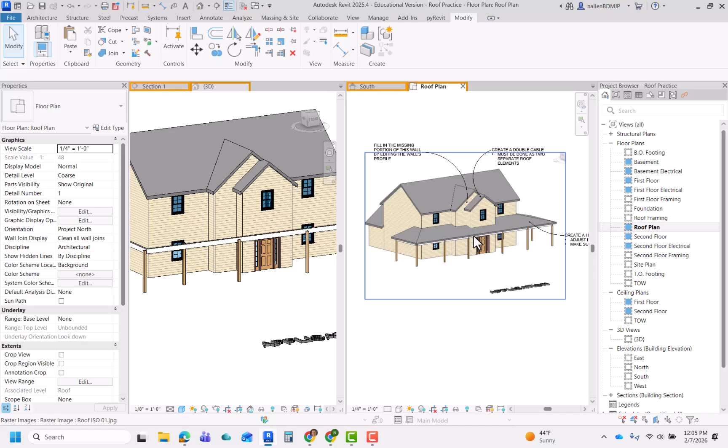Now in the project that I've given you, there are some columns and beams in here already. And all this video is going to focus on is how to modify and make these columns and beams correct. And then the next one, the last one, will be how to put in that hip roof.

Okay, and if we investigate this and look closely at it, you can select on that beam and you recognize this is actually a wall. It's this basic wall here. That's how it's been created. Just like any other wall, it just happens to have a very high bottom constraint. In fact, the bottom constraint is the top of the wall. And then we've dropped it 1 foot from there.

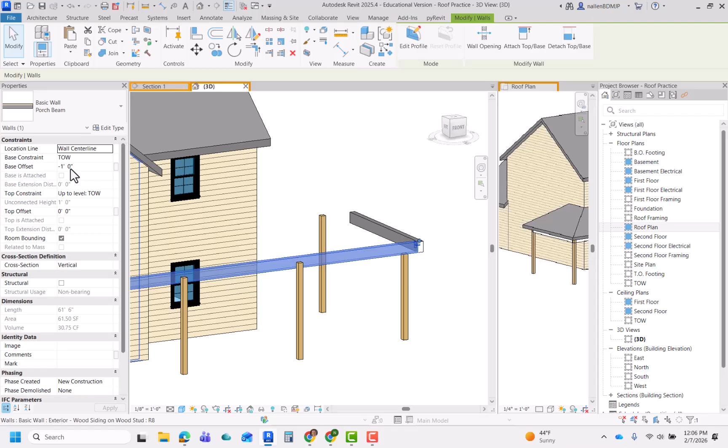Let's just look at an elevation so that you can see a little more of what I mean by that. Here's my datum top of wall. Here's the beam. It extends to the top of wall, which basically means you could put a roof on top of it just like any other wall. And then the bottom of this beam, once again, is extended all the way up to this datum and then subtract a foot so that it looks like it's a beam with some thickness.

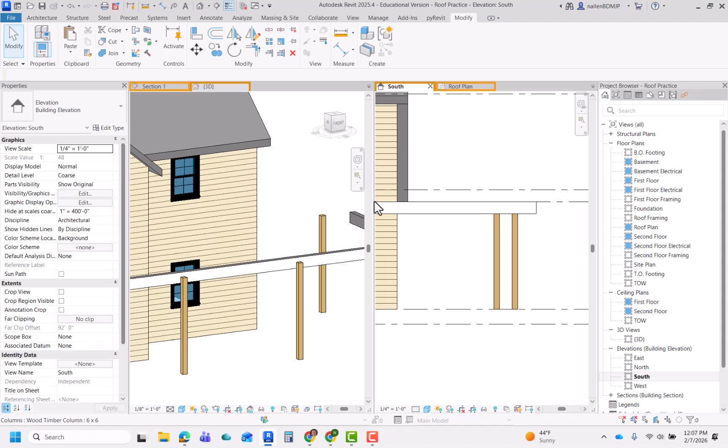It says over here that it's got 1 foot of total height. Okay, and that kind of implies that maybe this is a 2x12 beam. Now, you don't need to do the engineering on your house, so you don't know what beam size you need, but you can go with a 2x12, you can go with a 2x10. If you must, you can go with a 2x8. Any of those sizes will be fine. You can just guess one and go with whatever looks good.

Now, if we investigate this just a little bit further still, I've got a section that I can use to show you more about this beam. This is what it looks like in section. So it looks like there are two pieces that are actually structural. These would be like LVLs. And there's a big gap right here, and then a finished material on the front and a finished material on the back. In this view, it almost looks as though those finished materials might be gypsum board, but that wouldn't be the case in the real world.

Either this thing is going to be coated with plywood that gets painted, or maybe some LP SmartBoard, which kind of looks like wood, but it doesn't rot. It's a manufactured material. Or maybe this whole thing just gets wrapped in some kind of a metal, so we don't see the beam at all and it's entirely protected.

Now on the front side here, it's got a little extension before the finished material. And the fact that it's empty is not a good thing. Well, I'll have to fix that at some point, but that would just be a fur out, meaning we would put little blocks or pieces of wood in there to hold the finished material out a little bit further. And this is just for appearances. We don't have to do this at all, but it might just allow us to have our columns positioned correctly, or it might have something to do with where the roof is at and the look that we want with the beam and the roof interaction.

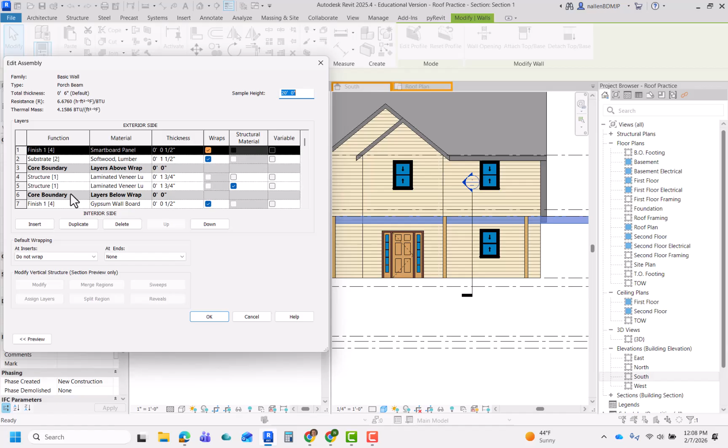So again, this is not a necessity. If you didn't want it or you want to change the configuration, you just simply go to edit type, edit the structure, and take out any layers or add any layers. So this one has a substrate of softwood lumber at 1.5 inches. That's the one I'm referring to here that you may not need at all.

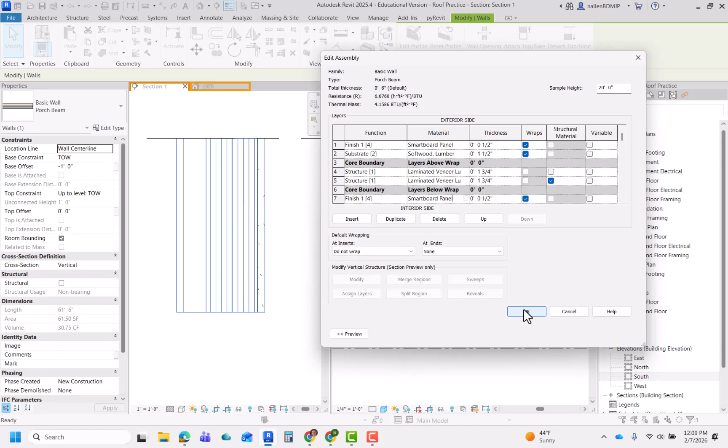And then it's got a SmartBoard panel on the front, and I should just put that on the back also. Not that you really need to do this, but I'm just going to copy this and paste that in. We don't want gypsum wallboard outside. It doesn't do a very good job out there. Okay, so there is my beam. And again, everywhere that I have a beam, the advantage is there's something there to hold up the roof.

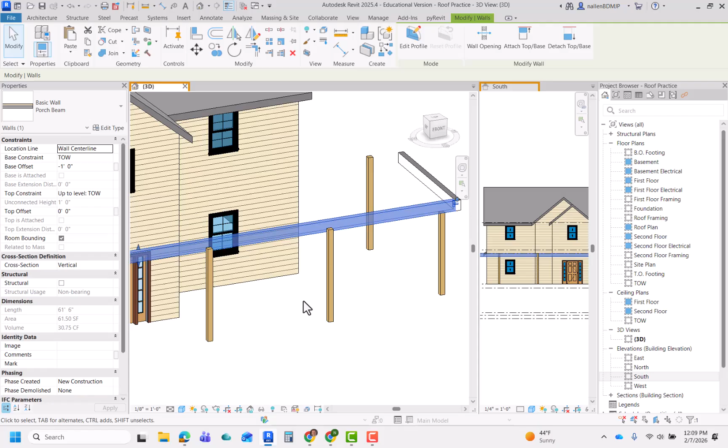Okay, students often think that columns hold up the roof. Well, they do indirectly, but they actually hold up the beam that holds up the roof. In almost any application, you have to have something horizontal to carry the rafters or to carry the trusses.

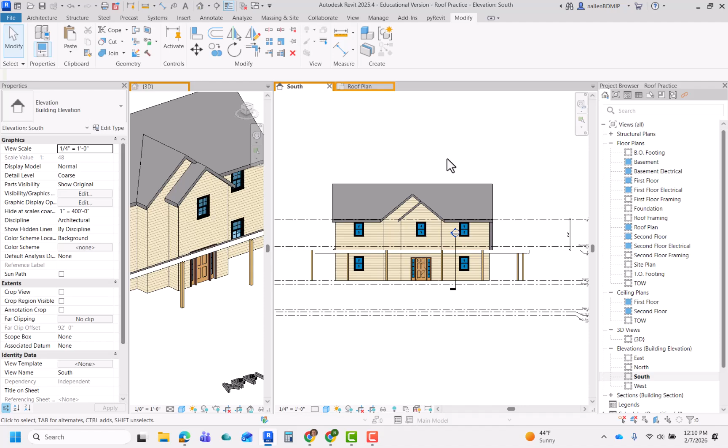Okay, so now let's look at those columns. These are nothing more than 6x6 wood columns. They're very wonky at the moment. You can see that they don't really fit well or sit directly underneath that beam. And I did that on purpose, just to make it so that you would have to figure out what to do. And this is probably an application you'd have on your own project.

So I'm going to go into the first floor. And you notice here that we can see the columns, but we don't see the beam. Okay, so there's something very important here. If you didn't have this beam in here, if it wasn't just given to you, how would you get it there? Right? And you can start in your first floor. You can actually just draw it with a regular wall or the porch beam wall. Oh, by the way, why don't you just, in your own projects, select this beam, Control C for copy, and then paste it into your project, and then you'll have that wall type.

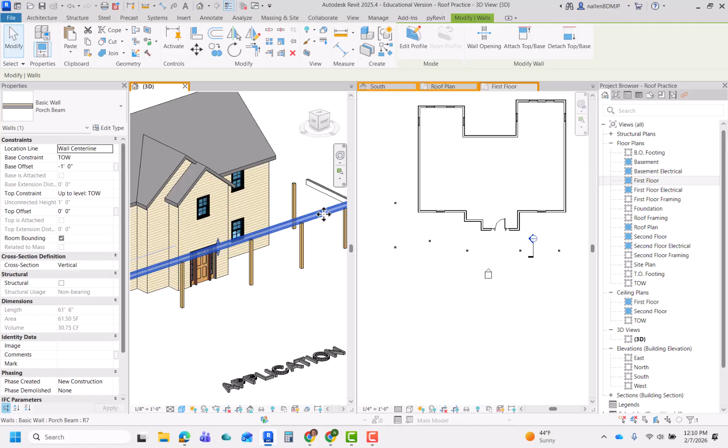But as you create this wall, you could start drawing it and let it be a full-size wall and then just change the height of it later. Okay, that's one thing that you can do. And when you change the height, it will disappear from this view,

which is why I actually like to just open up my ceiling plan, first floor, and you can see that the beam is visible here because the ceiling plan is looking at the first floor, but we're looking up now instead of looking down. And since the beam is high overhead, we can actually see it. And you can start drawing it here too.

I can do create similar after selecting that beam. Make sure that your constraints are right. I want this thing to start up at the top of the wall minus a foot, and you can see I'm creating a new beam. Okay, so that's how you'll get yours in there.

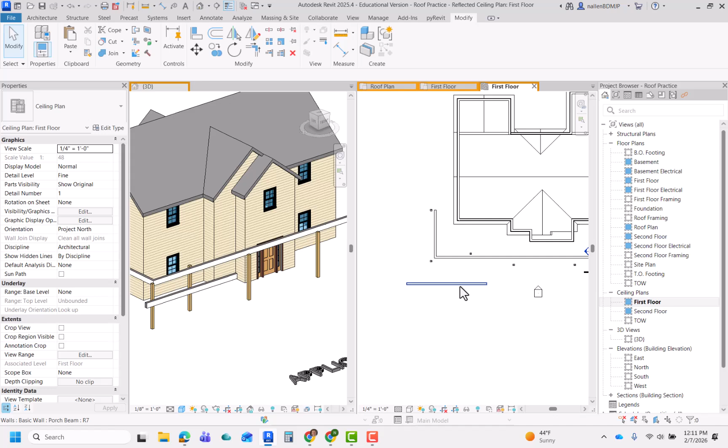But back to this discussion of columns. And these columns right now, they all need to line up. And after you have your beam in, you know what to align them to. So if I go back into my ceiling plan, see if I can get a little more space here. What I'm going to do is use my align tool, AL for align.

And then I'm going to come up here to some options, and I want to select multiple alignment. And that lets me pick several columns without having to redo the command each time. So I want multiple alignment, and I also want lock. And that means if the beam moves, the columns will move also.

So the first thing is I'm going to come down here to my beam, and I'm going to hover until I see that blue line right here in the center, click on it, and then I'm going to go ahead and select a column right at its center. And that means the center of the beam, center of the column are now in alignment and they're locked.

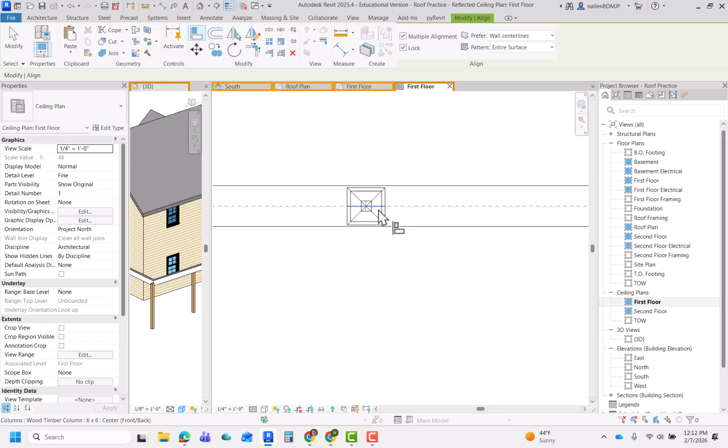Okay, because I chose multiple alignment, I can go pick out more of these columns, and it shifts them right into place. That one looks like it's already aligned, but I still want it to lock, so I'm going to click on it, and same with this one. Okay, it looks like I've missed just one here. That one's going to put it outside of the beam running this way, but I can fix that on the next try. Okay, so now I'm going to go and hit escape so that I can start over.

AL for align one more time. My settings are still there, and with one click, those two columns are now in alignment. They must have been aligned to each other. And then I'm going to hit escape and AL one more time so I can start over here on the right.

And notice that this didn't really account for spacing. You know, if I move some of these columns, but I actually want the spacing to be consistent through here, then I'm going to have to go into my dimensioning tool and make these either equal or just spaced out however I want.

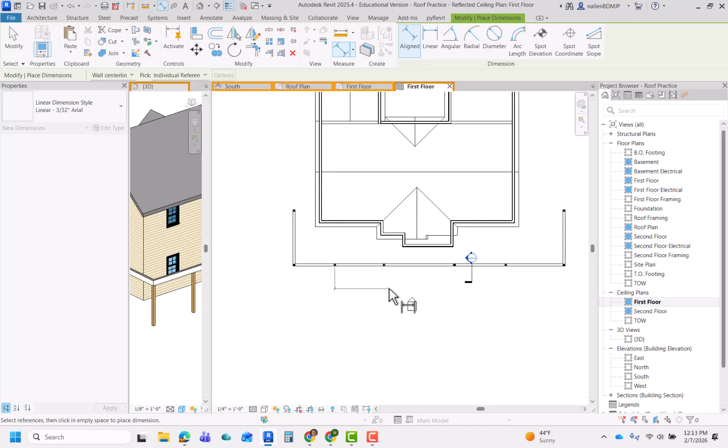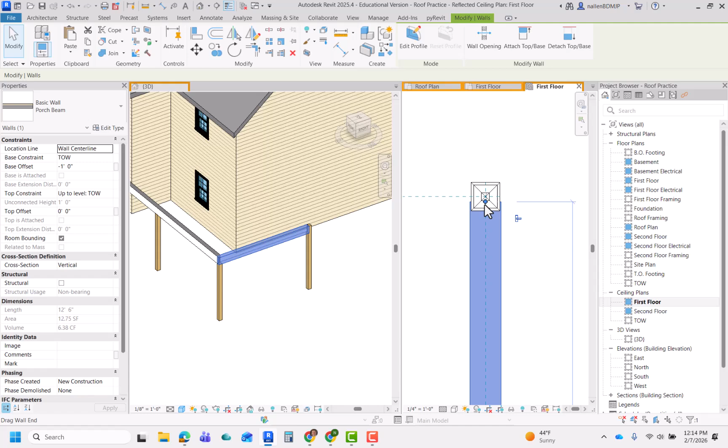Okay, and then also over here, let's see what this looks like in 3D. I would prefer that the beam was sitting on top of that column. And it's not really working, so I'll just pull that through and see what it does. Yeah, see, that looks better. Now the beam is on top, and over here the beam is mostly on top, not quite. Okay, so let's go fix that. There we go. Okay.

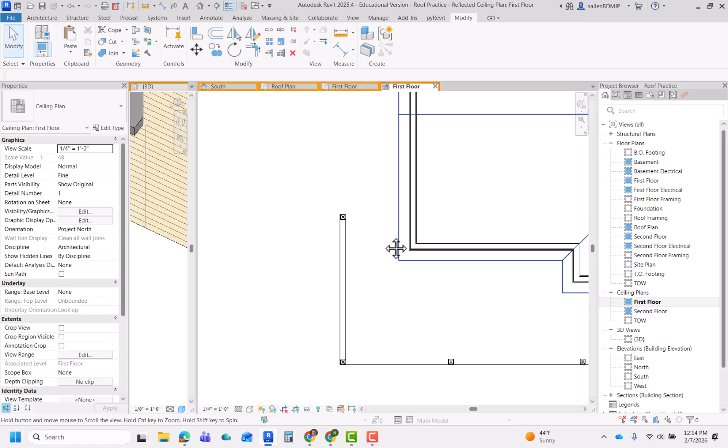So now we have just one remaining problem, and that is, let's look at this in first floor ceiling plan. Oh, we are there. I'm going to hide the roof. HH. Okay, the problem remaining is that the distance from this beam to the wall, I can go to the center, that's fine, is 6 feet. And the distance on the other side is something different. And the distance on the front, at least to this wall, is something different again.

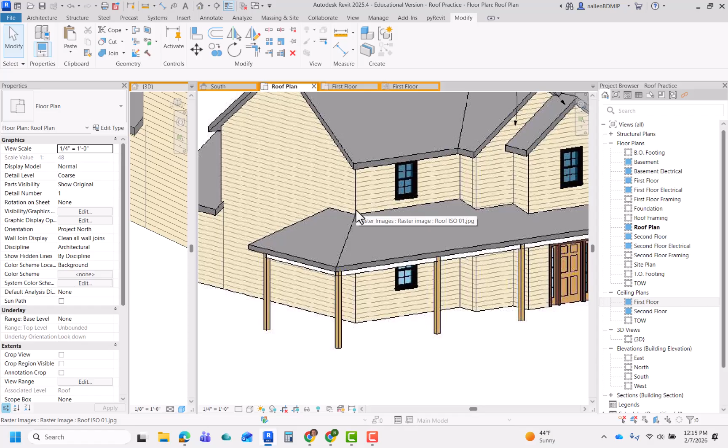So when we're looking at the finished product, and you notice that this hip runs perfectly up until it meets the corner of the house, that's only happening because of the spacing that I've used from the wall to each of my beams. And right now, we're not going to have that at all. You're going to have a line coming up, and it's going to look really awkward. It's going to hit the house somewhere in here, and then the roof is going to slope down and then run across the house. And it doesn't look very good, and people don't try to do it, but oftentimes students don't know how to fix it.

So the solution is, again, to make sure that whatever the distance you have from beam to wall is consistent on all three sides. I'll select this and tell it to be 10 feet. I'll select this one and tell it to be 10. It already is. I'll select this one and tell that to be 10 feet.

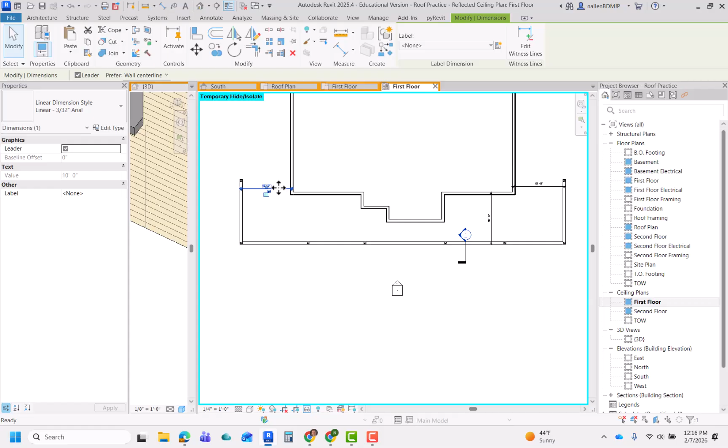And now I'm ready to start creating that roof. We're ready to do the hip. Let's look at it one more time in 3D and see that it looks like everything's been nice and cleaned up. And in the next video, we'll do the roof.